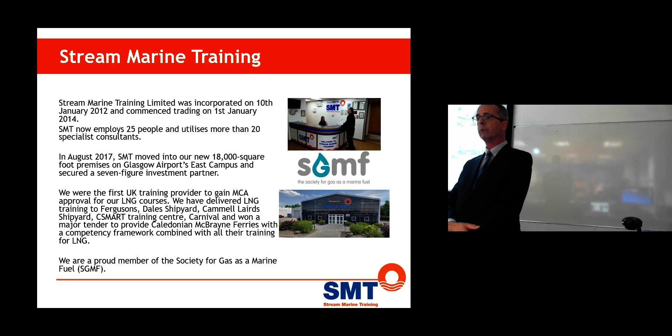A little bit about Stream Marine Training, because we don't advertise that well. We're basically based at Glasgow Airport. We've got our fire grounds and our swimming pool there. We also do offshore training, MES training, and work with quite a few companies. We have the boat site about 15 minutes from our building, so we are right at the airport.

A couple of bodies we are accredited with are the MCA of course for training courses, and MNTB as well. We also have Bahamas approval for the polar courses - polar survival, polar navigation.

A couple of customers we work with: we also have IMarEST, Carnival, most cruise lines. We work with more or less all the cruise lines. CSMART in Amsterdam, we do the training there, and we actually also trained the MCA. With Teekay we do all the Yamal projects survival training.

So let's start - IGF and LNG. These are two different things. When we talk about LNG vessels we use the same word IGF, but they're two completely different areas. LNG at the moment has the biggest interest and the most vessel orders, but there are quite a few more fuels which comply with the LNG or IGF regulations.

The items I would like to discuss tonight are listed here: why natural gas - why are we actually switching over to it? The principles of LNG, natural gas characteristics, which are very important because they don't behave the same as regular fuels like diesel and heavy fuel oil used on vessels. LNG applications, LNG safety, which is quite important, the containment systems, and a little bit about bunkering.

But what is the main reason for natural gas? Well everybody will talk about environmental reasons first. Is that correct - environmental reasons only? More than that. Actually the first one is quite funny - it's economic reasons. We're basically betting that the prices of LNG will come down and the infrastructure of LNG will be there, and then the prices you will see as well. It is actually cheaper than low sulfur diesel oil.

So economic reasons - natural gas at the moment, what we have available is about 60 years at current consumption rates, but consumption rates are going up of course. You'll see China coming online, India. You've seen the news, certain areas where the smog is going high - China has a lot of areas with heavy smog, and of course there the consumption of gas is going up.

But at the moment the amount of gas is roughly 60 years at current consumption rates, and we're finding gas everywhere at the moment. There are big projects coming online - you see that in Mozambique, Australia - but it's more or less all over the world you see big FLNGs coming online, and the gas production is actually going up.

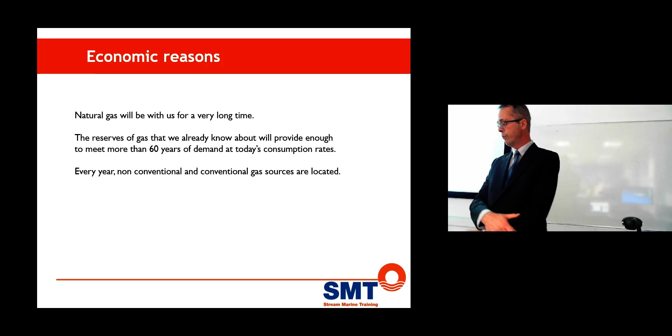So to give you an idea of the prices, I'll show you the different fuels here. I don't want to bore you tonight, but at the moment you'll see the current prices are roughly 285 in '18, 260 at the moment - Henry Hub and also Zeebrugge. Why the price difference between these two places?

It's the shipping cost, yeah, and that's it. Also storage, but yeah, you're right. It is quite cheap at the moment, but also with what you see from Yamal coming in on the spot market. Spot market is not normally how ship owners actually work at the moment. They basically have to sign contracts for extended periods.

Why is that? Because there's hardly any infrastructure. So if you see, for instance, Carnival, they have a contract at the moment, Disney as well, for 6 to 8 years, fixed price, and of course the supplier is most likely the larger companies like Shell and also Exxon. Shell at the moment is definitely holding the most of the contracts. They go for a roughly price at the moment between $6.50 to $7.

In MMBtu. The reason why these oil companies have such high prices is because of the infrastructure, they have to develop the bunker vessels. They have to get the logistics, but when the logistics come into place, then you will see the prices over the years come down. 2 years ago in Rotterdam we only had one vessel.

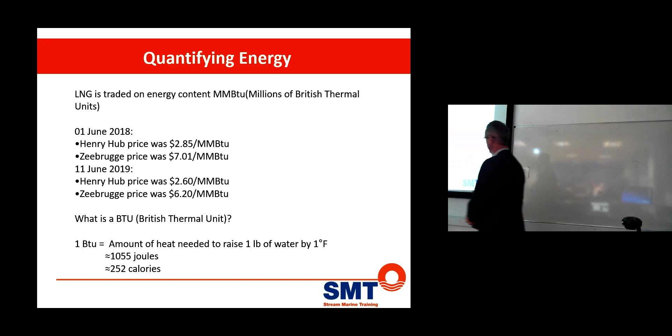In general, at the moment the trading standard is still 1 million British thermal units. It's one of the values we still have. Russians don't like it, so you see always the prices from the Russians in kilowatt kilojoules, right? But officially, this trading standard is still millions of British thermal units, or 1 BTU. It's like a certain amount of calories, and that's good.

That's what everybody dreams, right? Ecological reasons, yeah? So suddenly all the ships turn green. I see the Nova, fantastic, they have a blue environmental friendly logo on the side, right? Are we all believing that? No, no, well that's very good. So let's take that on board, right? Forget about it. There is some improvement in certain areas, but it's not the end and beyond. So it's just a step. LNG will be a stepping stone to other fuels which are coming in the near future too.

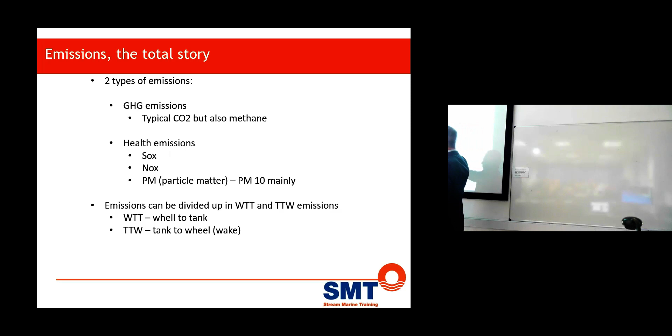The next one is something you will see in many cases: emissions can be divided into well-to-tank and tank-to-wheel. What I'm trying to say here is like when I buy a battery car, is that really environmental friendly? You see, that depends on if you look at the whole picture or just a small part of the picture, right? And that's what I try to say.

And that's a great shift, because where is the responsibility? To give you that in perspective, I will show a slide a little bit later on with the different fuels, but we first go to LNG and what the differences are and what the effects are with the different products. So if you look at NOx, you see a normal fuel, you see here also SOx, particle matters. You see LNG compared with HFO is roughly an 85% reduction of NOx.

SO2 is 100% reduced because LNG doesn't have sulfur at all. And particle matter is reduced by 96%. So that looks all very good, right? So far.

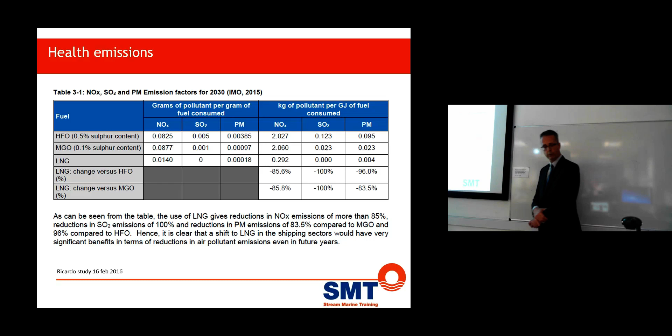Looks very good. This was also done by an independent study, Ricardo. They did it in 2016, and wrote another report two years later, slightly different, but it's a very good report. A bit boring, 170 pages, but it's good information. Gives a good picture.

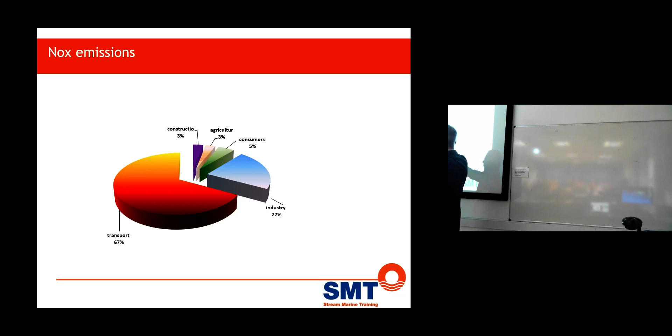Well, NOx emissions a little bit first. The biggest drivers of NOx - and NOx is extremely dangerous, actually one of the bigger polluters - more or less transport is the biggest culprit here. Construction side, consumers is very low. Industry can be controlled a little bit. NOx is basically produced depending on the combustion temperature - the higher the temperature, the bigger the risk.

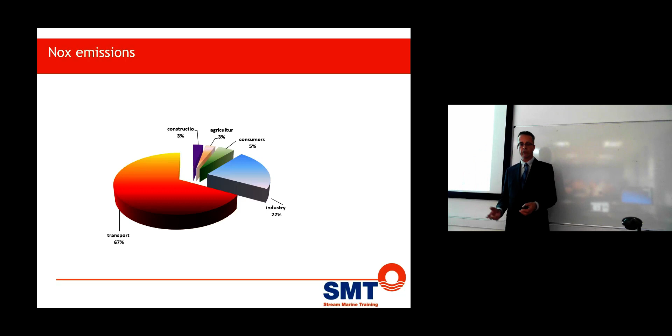But now we have another fuel, for instance like hydrogen, and hydrogen actually has quite a high NOx emission. So if you look at the whole picture, we need to look at what the product actually does in an overall concept, not just one bit. But NOx is definitely something we have to work on, because this is one of the more dangerous products.

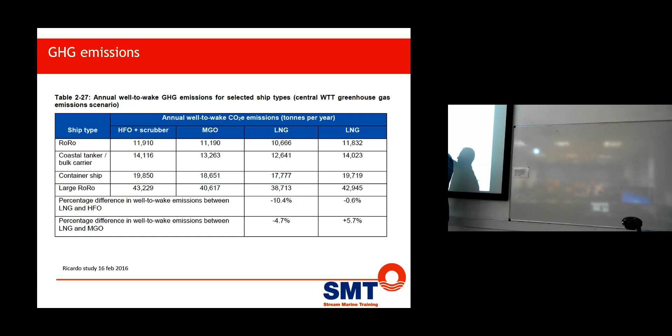Greenhouse gas emissions in general - if you look at this picture, it starts already becoming less interesting, right? I look here at the CO2 emissions, CO2 annual. I have HFO and scrubber on a RoRo vessel, and it goes down. Hey, actually I have more. How is that possible? It's a green product. I can have more emissions. And why is that?

That's greenhouse gas emissions, isn't it? Yeah, no - I look at CO2 emissions per year, right? Your fuel consumption goes up because of all these scrubbers in the system. For the LNG, you can have a reduction, yes, but it depends on where the LNG is coming from, right? If I have to send it halfway across the world, I also have to take into account the emissions of the vessel transporting it.

And then that becomes a completely different picture, right? So, having said that, you have to look at what actually the reality is. It's the same when I say look at the battery - if you only look at the battery, yeah, that's correct, but if I look at the whole picture, then it becomes a completely different story, right? So LNG by itself does not always reduce the CO2 emission.

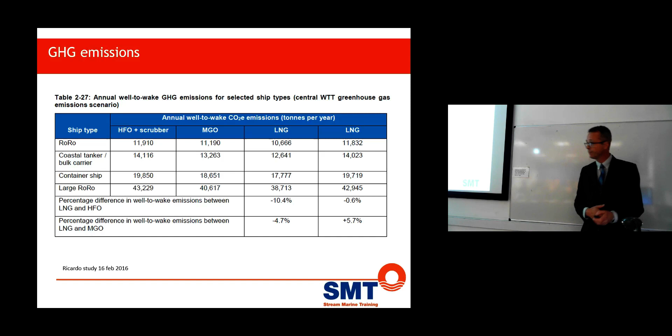Okay, emissions, the total story. Good. So I give you a couple of products here, and this is exactly what I'm trying to say - who is responsible for what. If you are a ship owner, do I have to look at the whole CO2 production, or only at what I'm consuming? Is that correct or not? So when I buy a battery car, am I only responsible, and I'm very green because I have the battery, or should I also look at the whole picture - the production to produce that battery, to scrap that battery, and where the electricity is coming from that I'm filling up my car with?

So then I have a couple of fuels here, and we'll go over them step by step. It's not really LNG awareness, but it gives you an idea of the different products.

So what ship owners are doing, they're shifting the liability. They say, well, listen, I only have the well to the tank, right? The emissions I am responsible for are tank to propeller. So when I reduce that, then I'm fine. Yeah, makes sense? And then I'm green, and I have a big sign on my ship saying that I'm actually green. Good. But if you start looking at these ones, you see as well that LNG, yeah, it reduces, but it depends also where it's coming from.

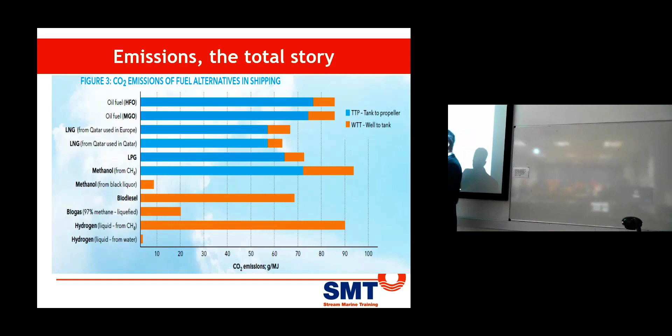Good, but some food for thought, so look at it as well. Hydrogen - there's a project going on now between Australia, Japan and China. They want to transport hydrogen to Japan and China. Very clean, hydrogen is very clean. Well, it comes from Australia, and they actually make it from LNG. So most hydrogen is actually made from LNG.

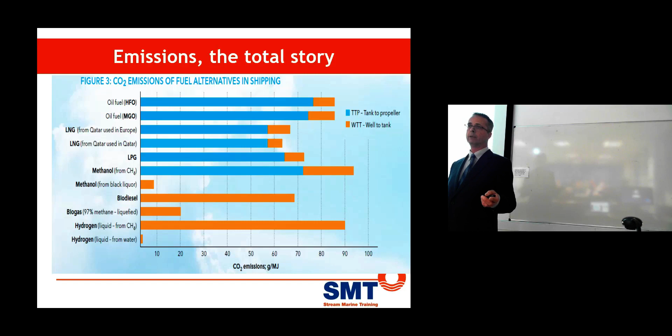Next one. In the shipping industry, everybody is familiar with the 2020 emission regulations. Some people have nightmares about it, others don't. But there's a couple of things you have to be very careful about.

Because everybody thinks a dual fuel ship is actually operational, always ready. It's not. If you look at the tier systems of an engine, more or less, when I have an engine which complies with tier 1 in the IMO regulations - the California regulations are slightly different - then I have to comply with these emissions. And how do I comply with these emissions?

It's done on the test bed. On the test bed, it's in perfect conditions - that means I do all the maintenance. But if I go into operations, you will soon find out that I'm not complying, or just barely make it. The stricter ones are tier 3, and everybody's talking about tier 3.

Ready? Most engine manufacturers are basically lying. Right? Because they say we can meet the standard of tier 3, but you have to run it on LNG. And that's a problem, because when I start maneuvering and I switch over to diesel oil, I'm not compliant with IMO anymore.

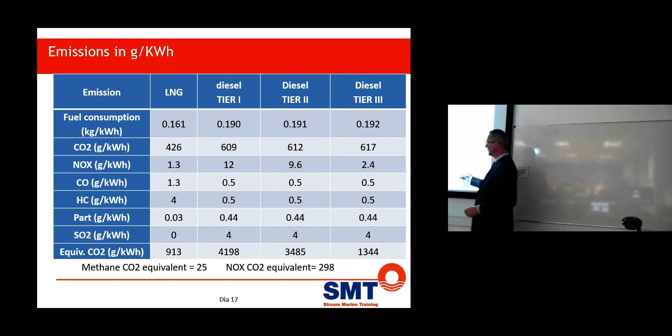Because if we don't, we have to bear in mind that any leakage of methane, methane slips by bunkering, methane slip to valves which are leaking, any methane I put in the atmosphere is 25 times worse than CO2. And if I go with my temperatures very high and I get NOx, that's 298 times worse than CO2. So that's something I have to avoid.

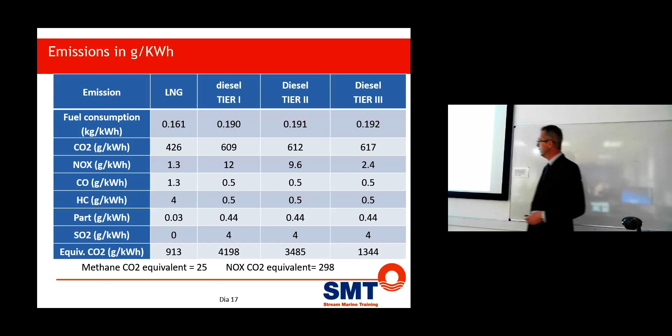And the NOx emissions, if you can see as well, between tier 1, 2, 3, you will see that the NOx goes down, but you have to do something for it. Nothing comes for free in this world. So if I want to reduce the NOx, I have to increase the amount of fuel. So the amount of kilograms per kilowatt increases. And that's the only way I can reduce my emissions, to keep my temperatures as low as possible, so that the high end of the combustion temperature doesn't go above the maximum temperatures.

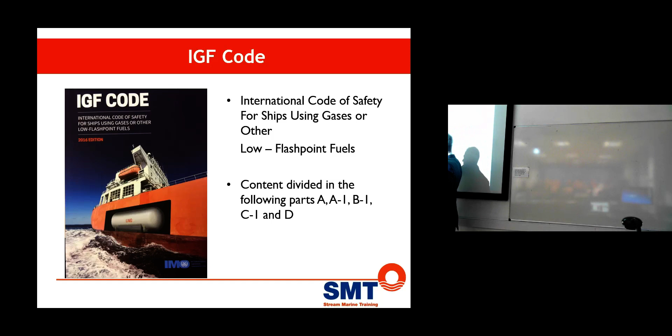Okay, so IGF code, and that's more or less a code. Everybody familiar with coded vessels? Well, you get a coded vessel if there are certain requirements which cannot normally comply. Of course, we've got Lloyd's, we've got the MCA, so everybody knows lots about it, right? But we figured out that one of the big problems with LNG is it misses one item. It's basically our old fuels with a flash point below 60 degrees. So we needed to get a different setup for these vessels.

So a code was developed. I think it started in 2005. It took a couple of years, and in the end it took up to 2015 when it was adopted. In 2017 it came into force.

But what is the problem with this code? Well, I got Lloyd's here. What is the problem with this code? Nothing wrong with it. It's perfect, right? But we forgot a couple of things. The industry is developing so quickly that there is nobody who can keep up with that code. And that's a big problem.

So by the time they got this in effect, there were two products or more on the market. One was LNG, so people thought about LNG. But then we got methanol, so methanol is in the pipeline to come. There's fuel cells, which I think we're going to get next year, 2020 - we get a chapter in it. But in the meantime, we've got hydrogen, we've got ammonia, we've got LPG. There's already ships coming out with it. Synthetic LNG, that's not discussed at all in this book.

And as we go as well, the idea of this is that there's a goal and an approach to provide mandatory regulatory provisions for safe and environmentally friendly use of LNG as a fuel. And what we're looking at is the design, the arrangement, the installation, the control, monitoring and operation of the machinery, equipment and systems using LNG as a fuel, and to minimize the risk to persons on board, the environment and the ship's structural strength and integrity, all taking into consideration the nature of the fuel used.

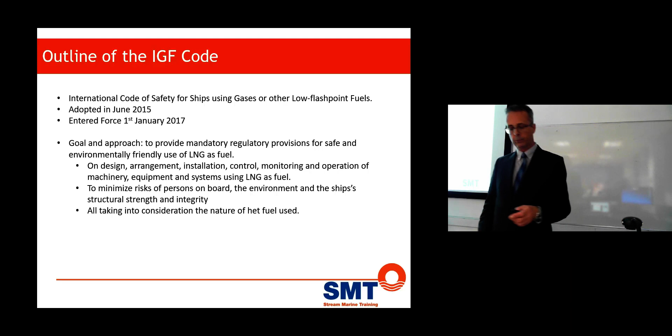Okay, so it came into effect in 2015, became mandatory in 2017. So after 2017, people who work on these vessels have to be trained, right? So there is more or less a basic and advanced training. Ships before 2017, when they get retrofitted, people have to comply with that. But you can still come on vessels which are built before IGF, before 2017, but crew members basically were not really having the tickets, and it's not mandatory.

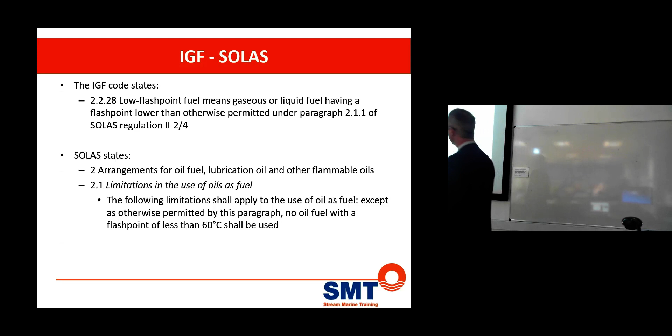So the IGF code states, low flash point fuel means gaseous or liquid fuel having a flash point lower than otherwise permitted in paragraph 2 of SOLAS. And the big drive, of course, is SOLAS - you shall never use a flash point lower than 60 degrees. Why is that? Well, it was written down, and it was more difficult to change SOLAS, so you need to have a standard, because if you leave a loophole, everybody will start using it. That's very simple. So the IGF code is providing information on gases and other low flash point fuels.

So how does it work now? There's already a couple of projects with the MCA where hydrogen vessels are more or less approved. You get class approval, so each particular drawing has to be checked by the class flag state and gets signed off, so you can actually do that. There's already hydrogen vessels running. One is in Shetland, a little ferry, but it's only 5% mix, so that's not really real. But there are other ships running already. The Norwegians have one coming online early next year with liquid hydrogen, and one with compressed hydrogen.

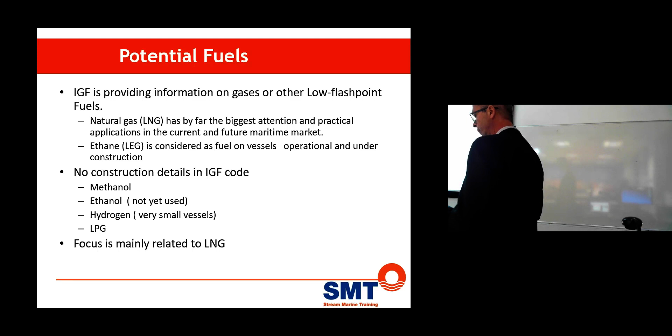Wastewater. Some countries now already say you can't do that anymore, so open scrubbers is already being banned in some places. And places like Singapore say if you have a closed scrubber, well it becomes chemical waste, so that's basically a problem. But having said that, a lot of these vessels have been building these scrubbers in the last couple of years, and they've already saved so much money with that, so the investment is already paid back. But it's not really a solution.

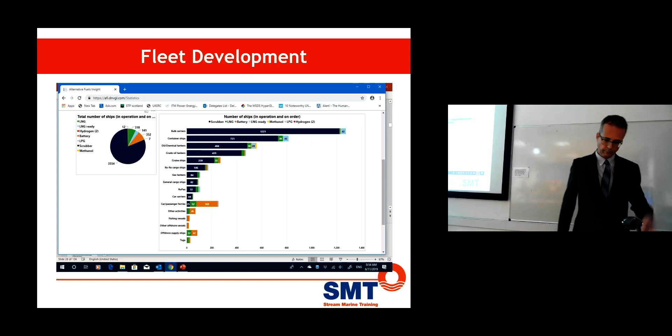Most of the time they actually sail on LNG. Methanol - I don't hear many people talk about methanol anymore, but if you really look at it, it's quite an interesting product because you can put methanol in normal tanks, you use a normal bunker tank. It doesn't take too much to retrofit it on a ship. The only problem is if you get a fire, you don't see it, but okay, that's the same with hydrogen. There's ways to work around it. It's more or less about availability - Stena Germanica has a plant quite close by, and again it's like availability of products. Availability of LNG was also a long time a showstopper. Availability of other products will be a showstopper in the future, because the infrastructure has to be there. If there is a demand, somebody has to create it, so somebody has to invest in it.

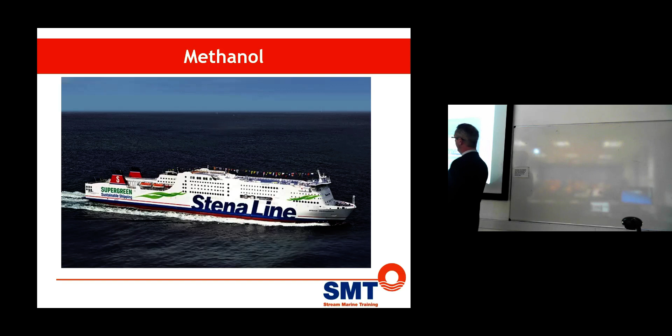That's how it more or less works. Everything is expensive - if you look at the big picture, it becomes even more expensive. So cruise ships as well, you have to give up a lot of cabins in order to sail with LNG. So anything I can do to get that back is a benefit, because cabins make revenue. That's no doubt about it. But methanol definitely has an application for the future when it would be available. I agree it's not a very cheap product, but it can be made quite cheap as well - it depends on where it is.

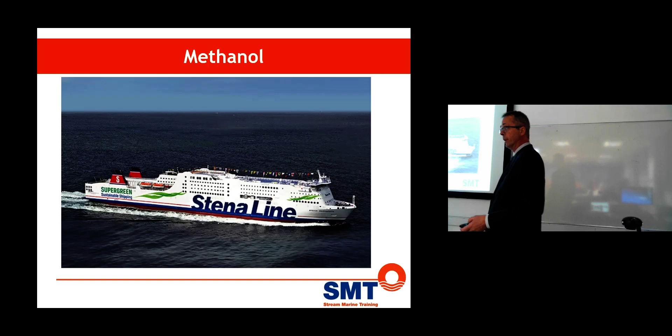Well, compressed, it's very explosive, it's hard to get the system tight. It doesn't really like running in an engine, although everybody says that it can run in an engine. It's not ideal, it's very hard to do the combustion, but it would work in a fuel cell. Fuel cell development is not that great at the moment - there's no real shipboard applications at larger scale. You see now as well, read in the news, like up to a couple hundred kilowatts ship side, but shore base you can go up to 1 megawatt for fuel cells, but we're not there yet.

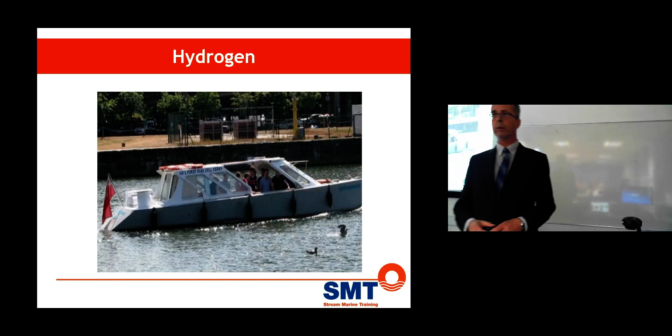So hydrogen as well. So what is natural gas? Well, that's a very good question. It's a mix, and that makes it bloody complicated, right? That's something to realize. It's easy when you operate from one port to another port and use the same gas every time. It becomes much more complicated when you start different geographical areas, because the product - there is no standard for LNG. It depends on where it's coming from. But the main components of LNG are more or less methane, ethane, and propane.

So when I get a bunker sheet - that's another one - on a ferry or if I'm on a cruise ship, I get a bunker slip from the refinery. I have to take it, I can't take a sample, because it doesn't give me the right information. So I need to see a sample sheet, and the sample sheet will give me the content for how much methane, how much ethane, and how much propane. LPG goes from propane to butane, but I must say, in normal bunker slips I always see some remains of propane still available. And after that it becomes gasoline further down.

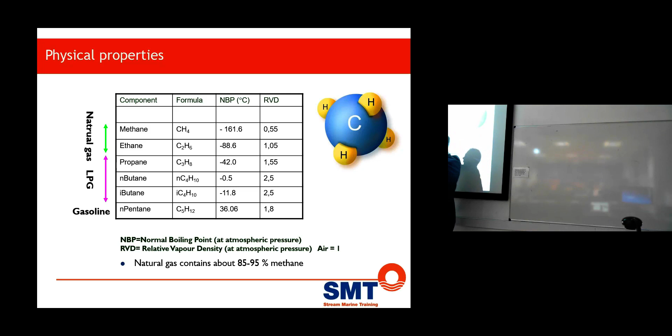So when I get an amount of LNG on my ship, as soon as I get it in the tank and I get boil off gas, which is only methane, my composition of LNG in the tank starts changing. So I have to be able to manage that. Ethane and propane will not boil off, so I have to find other ways to get it into the engine - it's not like just using the boil off gas.

One of the ships, I can't say which one, but it was a passenger ship. They got delayed by 2 months, so they started using the boil off gas. After 2 months, they wanted to start the engines again - no go, because the consistency in the tank had already changed that much. So they basically had to bunker again and get everything mixed up before they were able to start it.

In the manufacture of LNG, where you take your natural gas, you're generally stripping out the ethanes and propanes in the LNG train. No, you just end up with a mix - it's not methane 99.9%. I'll show you in a moment. I can't strip that out.

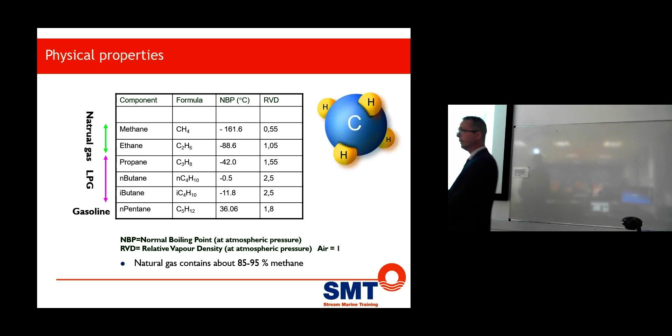But don't they produce methane with biodigesters? There are small units now, 1 megawatt units, springing up all over the country - biodigesters - and yes, I can make pure methane there. But that's not what I normally sell because I need much more product, so I have to work with a standard for an area.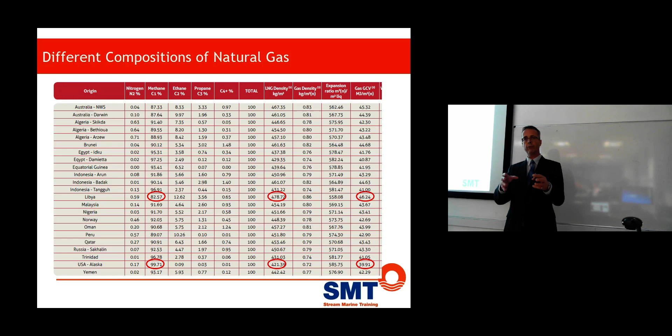The problem for a long time was that you have different places where gas is coming from, and of course somebody didn't get the right mix of sources together, so you get big differences between different places. To take an extreme example, gas originating from Libya has a methane content of 82%, and a density of 478, and 46 megajoules per cubic meter.

Now everybody asks me every time the same thing: what is the best product? And you know what my answer is? Calorific value - it's the gas which my engine is set up for.

When BC Ferries built two ships in Flensburg, they did the sea trials, then of course they went to Canada and couldn't meet the normal speed. That's because Alaska has a very high methane content, so they basically had to set up the engines for that specific gas - that's very easily done - and then they leave it running.

So that's what I'm trying to say - if I am an operator, like CMA, operating in different geographic areas, you will get different gas. There is no standard as such for gas. If I buy from the national grid gas, if I go to Cryogenic, they have a mixture so they can mix some, but it's very limited. So I get a certain gas quality.

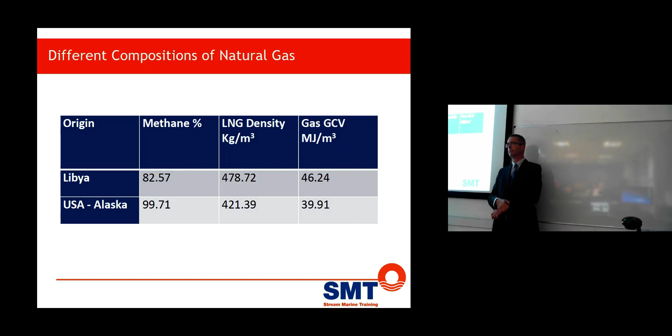The reason I'm bringing it forward is that when I sailed on LNG vessels, if we had a vessel with a cargo which had high ethane content, when you got to the bottom ends, you couldn't pump it, because the spray pump would not be able to pump at that density, the density of the cargo was too high. So that's why I was asked the question, but I'll come to it later. You see, it's not that easy, it's not like a regular fuel. So I have to manage it way more, think in advance, and see what's going to happen.

Good, so definitely different methane content, different density. That's very important as well, when I get a certain amount in my tank I have to write it down, and it has a certain megajoules per cubic meter.

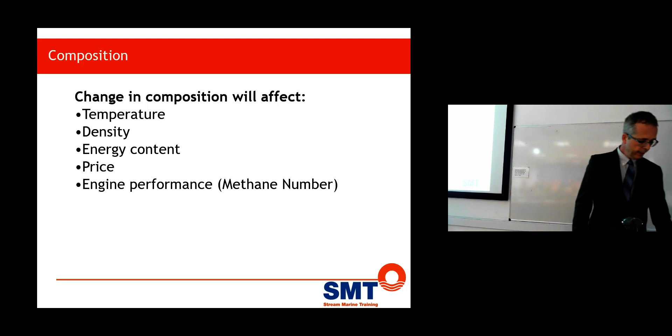Good, so changing composition will affect a couple of things, and that's something you really have to get in your head. Because an IGF tank does not have a sounding pipe, so I have to rely 100% on my automation. The most important ones are my temperature readings. Temperature is absolute vital, because when I get a wrong temperature, what's going to happen? It starts boiling off. It has happened already.

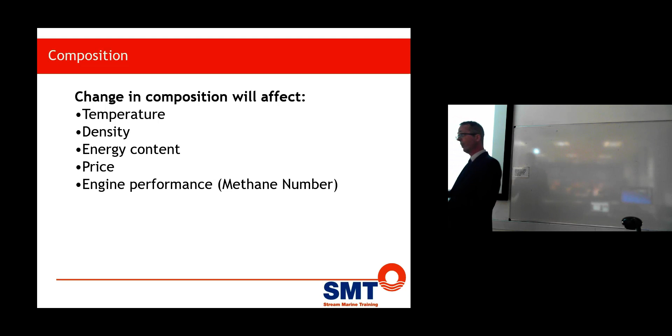With BC Ferries, there's nobody on board, only one night watchman. The guy comes on board, at the gate there's a camera that looks at the temperature of the truck. If the truck doesn't have the right temperature, it goes off. And guess what, I was training the guys from BC Ferries and they ran into this problem. They didn't realize it, because it's not so simple to start bunkering. So they ordered 4 trucks, and they were in Spain, but you can only have 1 truck at a time in the port. So these guys were sitting there for hours and hours in the sun. When truck number 4 came in, all the safety valves went off. They don't have any means to control it. Yes, a cruise ship has means to control it, they have compressors, all types of equipment to control it. But smaller, simpler systems don't have any control, they purely have to manage with what they have on board.

So one of the critical ones is the temperature. Of course, the density makes a difference as well. And then of course the energy content, and automatically the price. So the price is normally specified in the contract.

And then one of the big things is the engine performance number. If people are used to an engine that runs on diesel oil, I have a fuel pump and that's set. If I get more load, the ignition, the combustion is set. With a dual fuel engine, I can basically alter that. So I not only have my regular fuel pumps, I also have a common rail system, and I can slightly alter the combustion.

And one of the items you will see as well, on all the cylinders you have a so-called NOx sensor. If the NOx increases, it will adjust the combustion. So these engines are way more complicated. If I have a normal engine which looks exactly the same as any other one, and it's a Wärtsilä DF engine, you can have roughly 20 different options.

That's all I say. Yeah?

As an engineer, you really need to know what engine you have and what it should do and what it can't do. I've often seen people say, well, we have problems with our injectors. But what system? Is it in your normal diesel mode or in your gas mode? That makes a big difference. But the engines are way more complicated, and that's just a fact. Remember what type of engine you have.

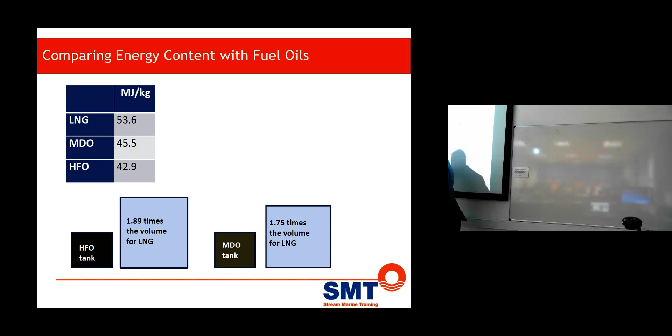Okay, other problem you have, of course - it's quite easy to say that as well. These ones are structural tanks, the LNG tanks are not. So that's another loss as well. You need also excess space, so it's not that simple to organize. You lose quite a bit of space, a lot of cabins.

Good, we'll quickly go over this, won't spend too much time on it. Methane number - everybody familiar with methane number? Methane number is just a fictive number. Pure methane in an engine is called 100, it runs with pure methane, the methane content is 100. Pure hydrogen is 0, so that already says automatically that hydrogen cannot be used in an engine. Although, when I Google on the net, I see that it's possible - possible up to roughly 20%, but after that it becomes really cumbersome. In a normal four-stroke engine, it will create knocking, and that's one of the things as well.

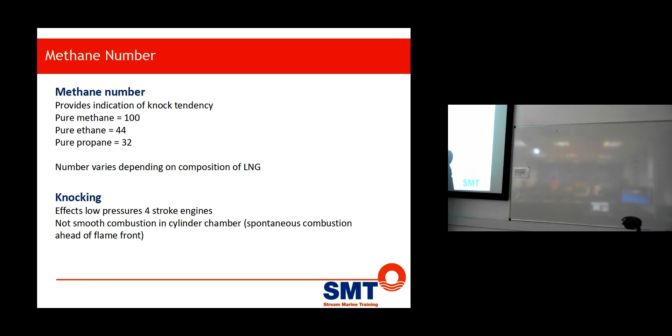If you don't have pure methane - ethane you see is 44. If this drops off, the knocking sensor has to be adjusted, otherwise I would get knocking in the engine. So the key is, all the engine manufacturers are working very hard. I hope by the end of the year to have a standard for this methane number. But at the moment, when I get my gas, I have to go to my methane calculator from the respective engine manufacturer. So I go to Wärtsilä, I put my bunker sheet in there, and it will give me my methane number, and it will tell you yes, you can use it in the engine, and the knock index on your engine should be this. If you're going out of these set points, it will basically tell you to call Wärtsilä or call MAN to see if you can use it, yes or no.

Knocking. Good. So the next one is cryogenics. More or less the dictionary definition, and you can search it as well.

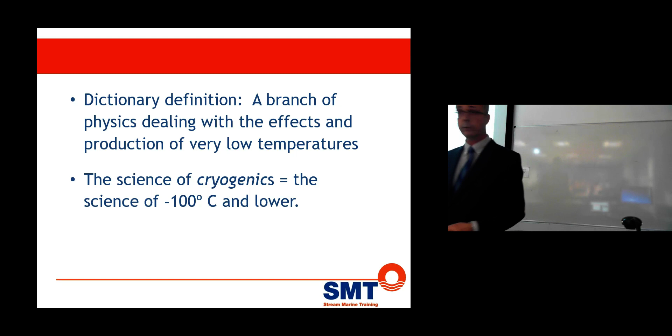The science of cryogenics is the temperature below -100. So that excludes LPG - yeah, it does, because ethane as well is like -80, so technically it's not cryogenic. Long story short, it's very cold. I would say anything below -75 is cryogenic, because the damage it does is similar. But it is very important, because the lower the temperature gets, the bigger problem I'm going to get.

What type of problems? It's maintaining it - it's like insulation, but also the materials have way more of a test regime. It's way more complicated, even simple PPE. At the moment, there's hardly any PPE for liquid hydrogen. If you see the requirements to go to -253, there are very few products that can actually sustain that. And that's what I said as well - if you go to roughly LPG, which is -80, the requirements for the equipment, for the valves, for all the automation, are way less stringent. When you go to liquid hydrogen, a lot of temperature measurement equipment can't cope with it anymore.

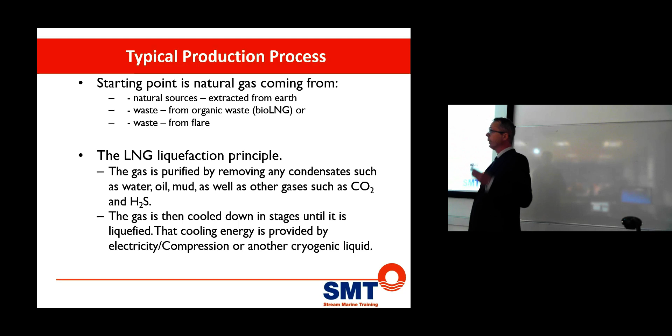So how to make a cryogenic liquid? I'll go over that slightly - we mentioned it as well. The starting point is natural gas coming from natural sources extracted from Earth, or from organic waste as bio-LNG, which is getting more and more common these days. Also from flare waste - you can use flare waste on the oil rigs. Then in the LNG liquefaction principle, the gas is purified by removing any condensates - water, mud, oil, and then CO2 and H2S. And more or less then I go down to the cool down process.

Well, a little bit more - you get transportation by pipeline, you get the treatment. Also one of the most important things: traces of mercury. Mercury - although aluminum is a very good product, it doesn't like mercury very well. So you will see in a lot of cryogenic systems where they use aluminum, it's often on the outside, so you can actually visually inspect it, because otherwise you can have a chance of aluminum-mercury corrosion. And then it's ready for transportation and shipping.

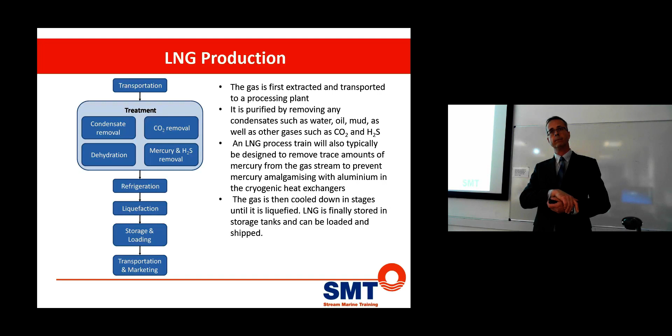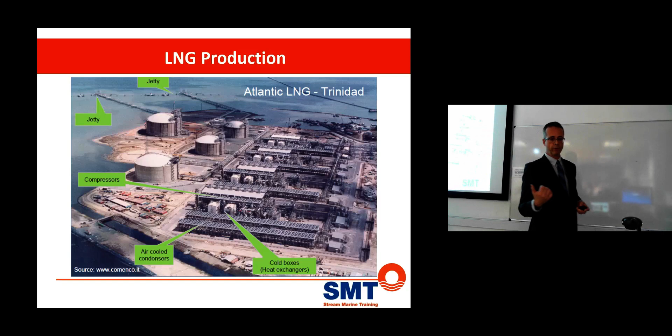As a ship owner, do I also have to look at the CO2 footprint to achieve this? Depends how green you want to be, or claim to be - you get this super green now, and you get the blue green. So you can make it as green as you can be, but it's a bit like the Volkswagen thing, yeah, you can adjust it. But that's something you have to bear in mind - it costs a lot of energy to produce the liquefied LNG.

Okay, so what is LNG? Well, very simple - it's UN number 1972. It will never change. That's set in the IGF code as well. That's the product, and that's it. It's a liquefied gas - remember, every time I mention it, it's a liquefied gas. It wants to go back to its original state. If you lock it up between two valves, you have a massive problem, right? Like with diesel oil, I can close two valves, but I always have to think this is gas, so it wants to go back to its original state, which is 600 times bigger.

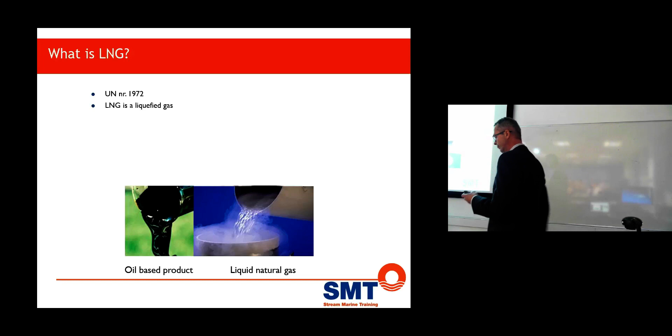LNG is natural gas that has been cooled and condensed to a liquid at atmospheric pressure, at roughly minus 162. Minus 162 - I always say it's a range when you look at the MSDS sheets, because it depends on what the mixture is, so how much methane, how much natural gas. It is also colorless and odorless.

Why? When I go at home, we mix acetone, I think, to make it odor, like mercaptan. But I can only do that when it's evaporated, right? So there's no point doing that when it's liquefied. Now the IGF code didn't specify the same as shoreside, because shoreside I always have to add gas after it evaporates.

It's quite interesting, because I started my career with Shell with a colleague, and he said, I never smelled anything. I said, yeah, that's right. He said, well, he thought we never leaked, but trust me, we leaked.

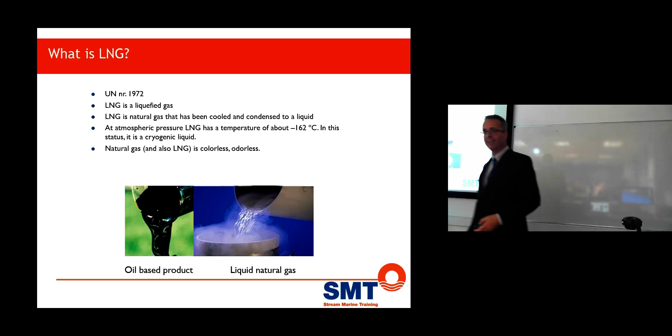Okay, so in gaseous form there's odor, and there's the safety benefits. But having said that, still 20% of people are slightly smell deaf or really smell deaf, so they wouldn't even smell it anyhow. It's non-corrosive and non-toxic. So I don't know why you have to inspect the tanks because it's non-corrosive and non-toxic. It's absolutely non-corrosive.

But it could get a stress corrosion effect on the tanks, couldn't it? Yeah, the stress on the tank, but I can see that on the outside. I've never, shoreside we never do any inspection, we do everything on the outside. And after I've seen tanks, well, my brother's tanks were 40 years old, and they look like new.

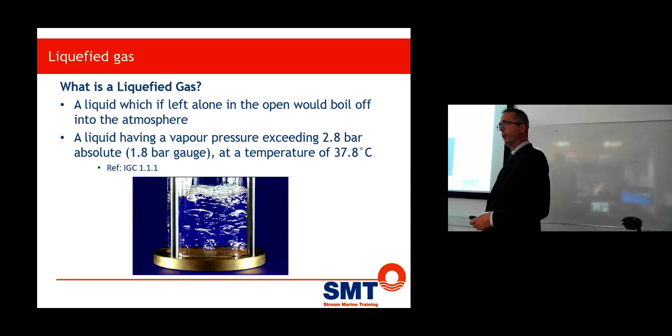All right, what is liquefied gas? Well, more or less a liquid which, left alone in the atmosphere, would boil off. Yeah, that makes sense. So if I put a little bit of nitrogen or LNG in it, it would boil off. So it wants to go back to its origin.

Physical properties of LNG, natural gas. It expands roughly 600 times. So remember, you can utilize it as well, or it can really work against you.

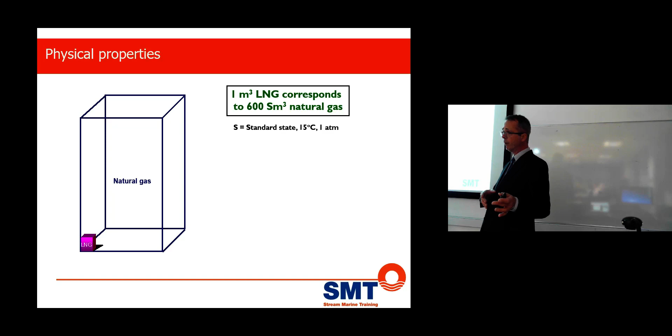So if I lock it up between two valves, I need a safety valve in the middle. So I always have to realize, when I close the valves, is there any LNG in the pipe? But I can utilize it as well to drive out the liquid, because I can close the valves, build up the pressure, and basically move it up. So that has a pro and a con, but that's more or less where it wants to go.

LNG is lighter than water, so it floats on water. That's good. So when I have a spill in the water, not a problem, it will go up.

LNG density is 450, water density is 1000, so it will float on the water. But it's also a disadvantage, because what do you think is going to happen when it floats on the water? And what do you need for evaporation?

Heat, and where does it get the heat from? From water, water becomes ice. From the ship which is laying next to it, so it will pull the heat out of the steel. Just be aware, it can cause brittle fracture. I'll show you some nice pictures after this. But that's where the heat comes from, and that's the disadvantage when it's floating on water.

So you will say it chills the water to such an extent that the metal can be affected with brittle fracture. Yeah.

A couple of other things I'm not going to go into depth, but a couple of products you cannot use for fighting fires with LNG. Well, water, because of density, right? So it will float. But having said that, you can use water if you get LNG on the deck to segregate it. You flush it with water, and the LNG will come off the deck, so it's a protection as well. But foam you can't use either, unless you use very low water content foam. So you see shoreside they will use the big foam generators.

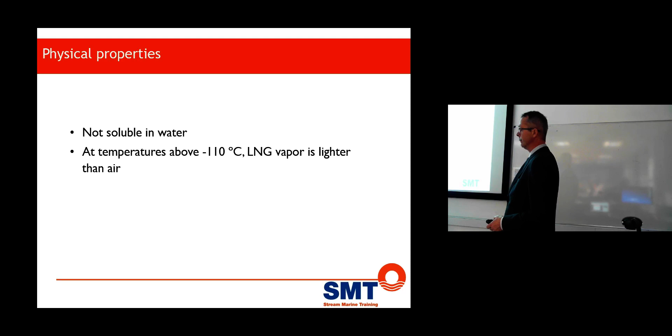Good, it's not soluble in water. By nature it doesn't like that. And at temperatures above minus 110, vapor is lighter than air. So what will happen normally?

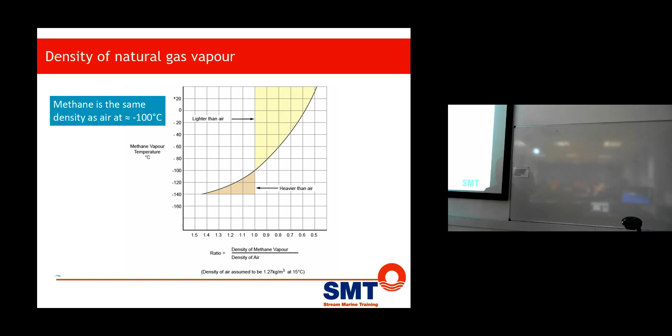So the relationship: raise the pressure, raise the boiling temperature, that's clear. And lower the pressure, lower the boiling temperature. That's very interesting when you see the watchkeepers, because suddenly when they reduce the pressure in the tank, you see the level going up. But you don't get more LNG, that's just the gas law. It's not like a diesel oil tank, you don't have that there.

Okay, flash point - you said it as well, flash point below 60 degrees. Well, what is flash point? You put heat in it, closed cup, there's still air in it, you have an igniter, and at one temperature it starts, the vapor will start to burn. Methane, minus 188.

That doesn't make any sense. Boiling point is minus 161, and flash point is minus 188. Well, one has nothing to do with the other. The fact is, vapor, even if it's minus 188, is when it gets spark ignition.

So what do we do? We make sure that there's no oxygen anywhere in the LNG system. So how do we do that? We use nitrogen first, and then of course after that we drive the nitrogen out again, so there's only LNG in the tank because I don't need any other gas.

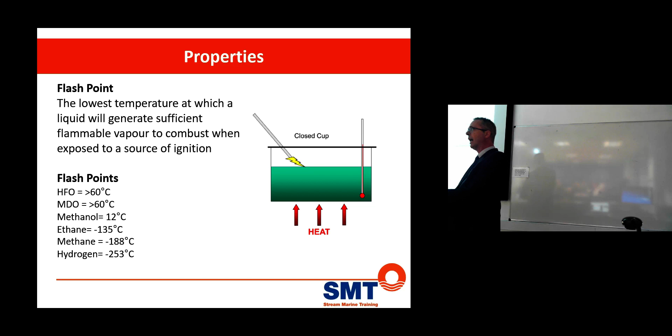That's often the mistake they make with bunkers, and that's why I agree that sometimes tank inspections are required, because when I connect the bunker hose, I have to go through a whole process to get the moisture out of that hose. So I first use nitrogen, either gas or liquid form, and then I purge it out, and then I can start using the gas. If I don't do that, then I get water.

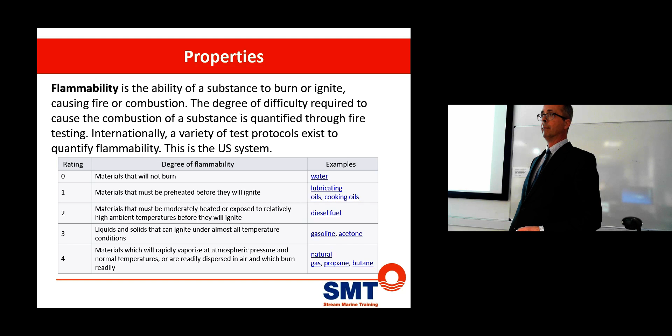Okay, flammability. Flammability is basically - gas is flammable, everybody knows that, right? So that's just a given. Well, that's more or less tested by fire testing, because materials that will not burn - water. Is that true? Exactly, so that's why when you say fire testing, you need to understand it's just a definition, but it's not all and beyond. But we know that gas is flammable.

Okay, another one we can argue about for a long time: natural gas auto ignition temperature. Auto ignition temperature is more or less the temperature a product ignites in an engine with a diesel process - so we don't use any spark plug, just compression and ignition. Diesel oil is 260 to 370 degrees, and well, that's what we use in a diesel process, we use diesel oil.

Could I use gasoline in a diesel engine? Exactly - so you could technically do it, but sometimes knocking comes because of pre-ignition or sometimes late ignition. But you could get away with it. Won't do much for your big ends or your back though. Exactly. Well, one of the things is you see natural gas doesn't have that temperature, so natural gas cannot be burned in an engine by itself, in a diesel engine, even with a high compression ratio - it cannot.

Absolutely not possible. LNG is not like LPG - LNG is a very, very reluctant product to burn. If I have a Pyrex jar here, I could light it and put it right in front of you - it looks like a wax flame. It's too rich or too poor; the rich is not very good. So I have to assist it - how can I assist the combustion?

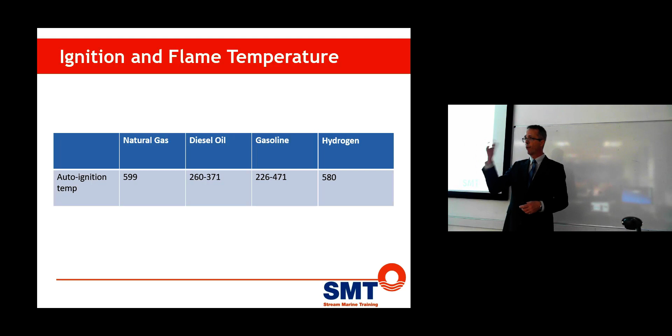Spark, but it's an auto process, yes. So then you can have a pure LNG ship, yes, or pilot fuel with diesel. So I still need a diesel pilot system, which basically creates the ignition, combustion, before the main combustion starts. So the engine does not run on gas alone - the dual fuel mode means it can run on diesel or diesel-gas.

It's about 5%, right, so I have those emissions as well. So only a pure gas engine can work with a spark plug - you need two means of injecting the gas. The pilot gas gets ignited, and it's not a simple process, and then you get a clean combustion. But otherwise you need to assist it with diesel.

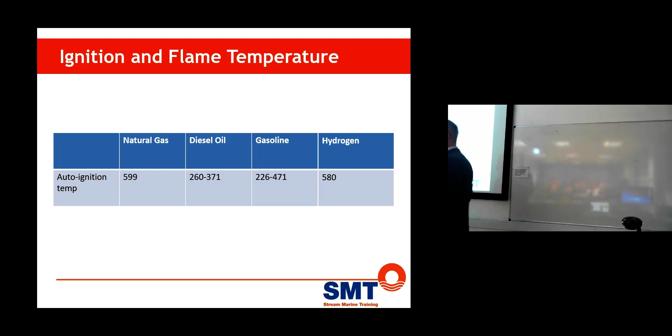Okay, so LNG - a good energy source, fossil-based fuel, that's what people don't like. Boiling point is approximately minus 162. It's a cryogenic liquid, natural, odorless and colorless. LNG is not flammable - natural gases are, so that's another misconception.

Okay, one of the others is - I'm not going to go into depth - flammability. The flammability range is basically set in the MSDS sheet: 5% for LNG, 15% is the top value. Guess what petrol is?

As long as I can manage it, the system is automatically designed so that at 20% LEL, the gas detectors, located in most spaces, will give an emergency shutdown 1, meaning give an alarm. At 40% LEL, it will shut down the whole system, isolate it, and switch over straight away to diesel oil. Nobody gets injured, and you wouldn't even notice that the engine switched over, with the exception of the alarm, but on the bridge they wouldn't even see it.

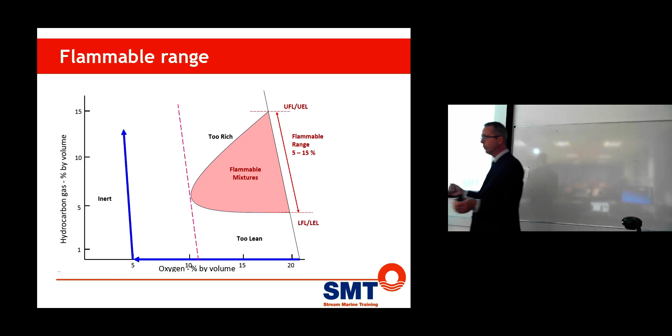Another way of working, you can see that as well. If I want to stay out of this area, on gas carriers, of course, I go all the way down to 0, and I don't have any oxygen.

On cruise ships, we start now using an oxygen deprived area, and some other ships as well. So our bunker system is basically with a reduced oxygen, reduced till roughly 12%. The bunker station is semi-inert, and the tank connection space is 12%. Why is that? Well, then I will never be in the flammability range.

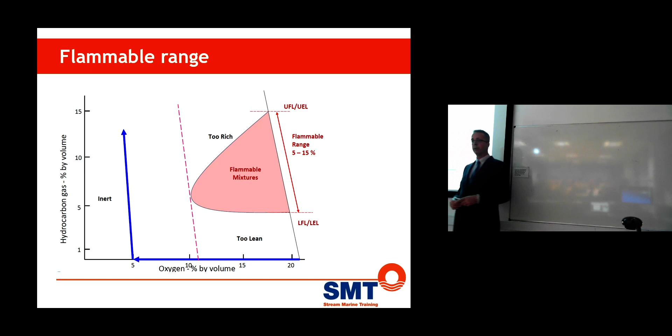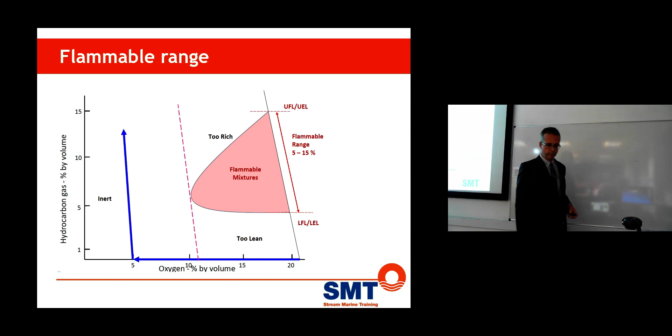So if there is any escape for gas, it still won't affect me. If I go into the bunker station, I basically first have to press the ventilation, and it will replenish it with oxygen. There's another reason why it doesn't go further than 12%, related to gas detectors, so we can protect the space as well.

We learned a lot of things because they took sensors and stuff, and now we know in an open space, with 180 tons, this dissipates within 14 minutes. It doesn't come far from the water, but the one really important thing is that the flammable area is very small.

So the flammable area is inside the cloud. If you're standing outside the cloud, you can have a cigarette wherever you want, it will not ignite. So that's great, a couple of tests.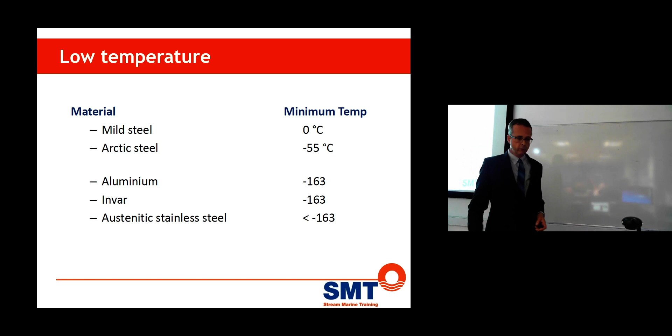That is roughly there. So when I go colder, I need even more stringent materials. Stainless steel is more or less the better solution, but we're starting now to work as well with these Arctic steel tanks because it's easy to manufacture.

See the cracks? That's brittle fracture. See if I have another one. Yeah, brittle fracture. So you expose the steel to this, and the problem you're going to have is that if a product is exposed to cryogenic conditions, you do not know if it still retains the same mechanical values after that.

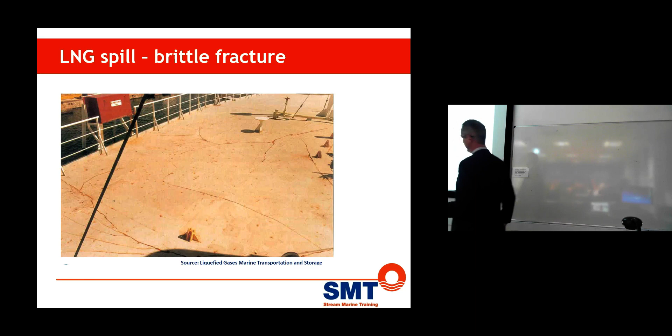So that's also an additional cost. Anything I buy which has a cryogenic value, like valves or gasket material, all has to be tested to check if the material structure actually permanently changed or not. But it can do serious damage, so that's to avoid it.

Okay, are we still doing good for time? How much? Keep going.

Oh, I'm doing good. Good.

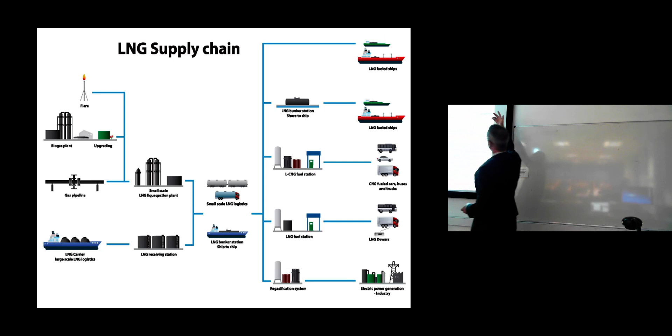All right, LNG supply chain at the moment. The most important LNG carriers have been around for 70 years. We've had no accidents, well, oil majors call them incidents rather than accidents. There have been some incidents. Big LNG carriers are all quite old, 70 years, this is more or less new. The smaller LNG fuel stations, CNG fuel stations, you see them popping up now, right, left and center. That whole market is starting to develop. LNG bunker vessels, two years ago there were only a couple, now we're getting them everywhere. It's going quite quick, with a lot under construction as well.

Okay, good, next one: IGF Code Chapter 5 General Arrangement Goals. Principle of segregation. The main philosophy is we segregate gas from normal operating areas. It's a bit more complicated than on a gas tanker. On a gas tanker, when I see a no smoking sign, I know I'm standing in a dangerous area, the gas is at the front. But on these vessels, like a cruise ferry or a passenger vessel, it's much more difficult.

It's much more difficult because I can have cabins next to the bunker station. Can I have a cabin next to the bunker station? Wait till you see the Iona. You can have everything next to the bunker station, and next to the tank as well, for that matter, as long as you de-risk it. So everything has to be de-risked. The words you always hear with these LNG vessels are hazardous and de-risked. They are basically crucial risks, but we can de-risk everything until there's no issue anymore.

The idea is that there is segregation of tank areas, engine spaces, vent areas, and no direct communication between gas spaces and non-hazardous areas. It has to always be reinforced with a cofferdam. And in hazardous area classification, there's segregation of piping systems.

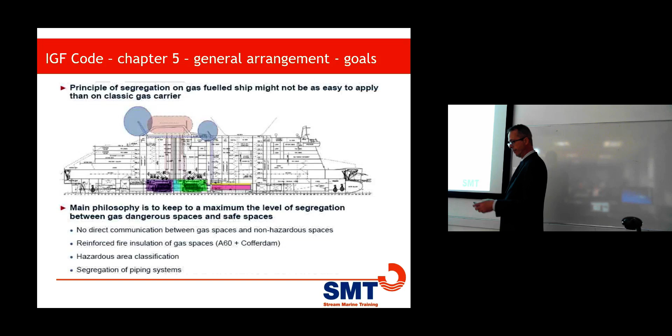Another good thing is the fuel pipes in the engine room are normally double wall, with two types of options. The first is gas on the inside and an inert gas, which could be nitrogen, at higher pressure on the outside. If I get a leak, the higher pressure means I'll get an alarm, emergency shutdown, and nitrogen will go into the space. The second option is exhaust ventilation.

I have an under pressure here, basically extracting to the funnel, with gas detectors at regular intervals. If I get a leak, the gas goes into the second pipe and it will trigger a gas detector. Gas detector 1 will be fine, but gas detector 2 triggering means everything stops and goes to safe mode.

Good, all right, simple fuel drawing. The first time I saw these LNG fuel drawings, I thought, my God, I took the wrong job. It looks really, really complicated, doesn't it?

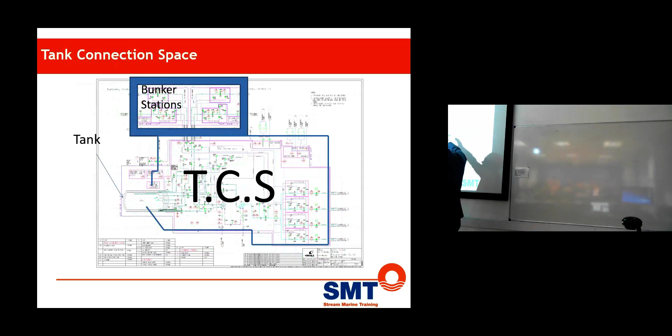So what you always have to do when you see these drawings for these LNG systems is reduce it. I've got my bunker station here, and my tank connection space. I'm going to reduce it further, and there's nothing left, right? Quite simple. But why is it so difficult?

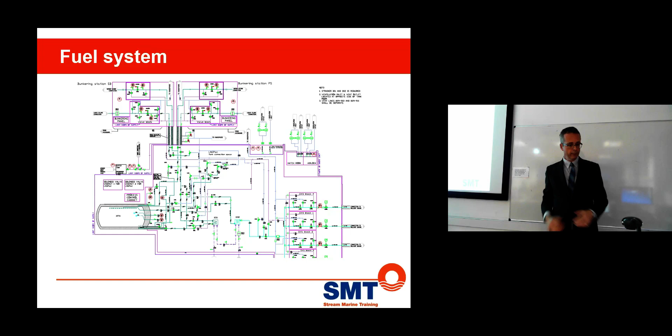The reason, as I said, is I cannot lock up my LNG between two pipes. You see certain valves, so automatically I need a safety valve. All these safety valves are interconnected, and I also have nitrogen purging. So this is a normal bunker station, basically has a pipe coming in, but you see here pressure gauge, temperature, they're totally irrelevant. That's the problem with AutoCAD, you don't see the difference between the sizes of the diameters. So you really have to look into these drawings. In the end, I go for this one.

It's quite simple, right? So what is different between a regular diesel oil tank and an LNG tank? First of all, I have a filling, and I have the return as well. And now I see two different connections - one on the bottom and one on the top. Why is that?

But remember, there is a relationship. When I fill up the tank, what's going to happen? I reduce the volume. So what happens when I reduce the volume? Temperature increases, pressure goes up, right? So I have to stop at one stage. When I top spray it, I reduce the temperature. What happens when I reduce the temperature? Pressure reduces. Ta-da! So that's the main difference compared with a regular diesel tank.

On top of it, you ask me, how do you do that with the pumps? Well, with the Wärtsilä system, fantastic, I don't need any pump. It's the best system ever. Anything with cryogenic and pumps is not a very good solution, right? But Wärtsilä figured this one out. Most ferries, you don't need to do that.

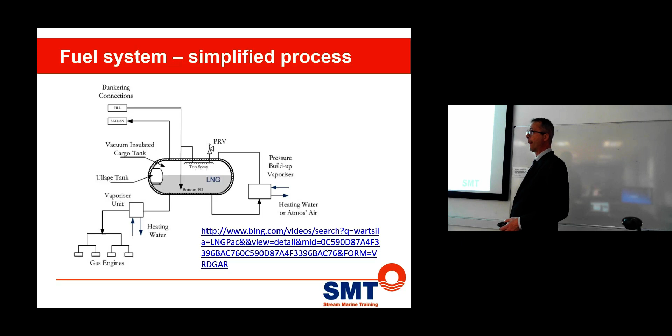This unit - that unit. Looks big. Well, you can make it any size you want, right? You can put it in a tugboat or you can put it in a cruise ship.

This is the tank, vacuum insulated. Basically, you have a vacuum on the inside, between the inner and outer tank. And then all the equipment is in this box. What do I see in this box? A gold mine - an absolute gold mine. So that's how it looks on the inside.

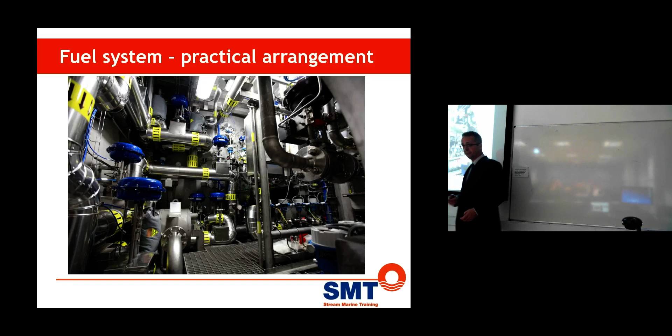Very nice stainless steel, very shiny. And then you see all the control valves - 20 of them, very expensive. So that's how it looks. It comes basically as a unit - this is the whole unit. You put the unit in place, you only need power, a couple of heating pipes, a little bit of electric cable, and then to the engines. That's it, it comes completely as a unit.

Okay, so the last one, and then we're done - bunkering. Bunkering, yeah. What is the problem here? What is the problem? Liable to go bang? No, but what is the problem? Does it look any good?

Quite normal, this? You've seen it quite often - pontoon in the middle, hoses sagging through, interface between. There's a bit of an afterthought, right?

Ship was built in Papenburg, right? Bunker station, traditional bunker station. Nothing fits, doesn't fit at all. Nothing additional, so everything related to safety has to be on the other side, which is already a bad move. It should technically have a quick disconnect. They don't have enough space here, so they actually do a flange-to-flange connection, which means every time they have to get a flange like that up. Normally you'd use a quick connect.

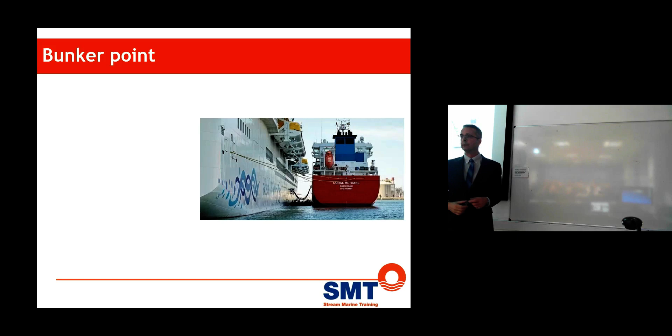Another operator, like MSC, they have another problem, because they pick up passengers in every port, in different ports - sending somebody with a cigarette here. Didn't think about it, eh? They didn't think about it. So with my company as well, they freaked out, the security ones now ensure all the balconies are automatically locked, because it's a problem - it can happen.

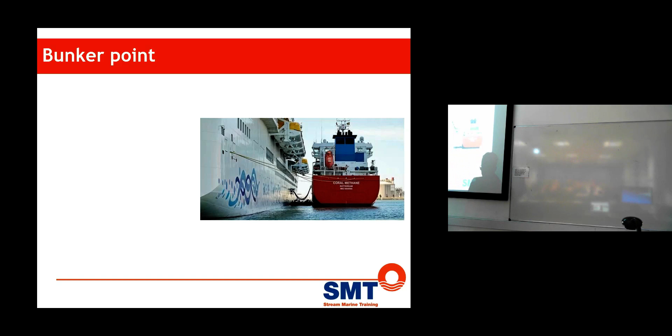Also, what they realize is the bunker speed is way too slow. So at the moment, they have to do it in Barcelona and also in the Canary Islands. The problem with the Iona is going to be in Southampton - they haven't really moved on very much with the bunkering there at the moment. They'll only have one port, and then the bunker speed has to be adequate.

So, vacuum insulated piping from the bunker station to the tank. That's a vacuum insulated pipe, double wall pipe, vacuum insulated.

LNG valves and breakaway coupling. In this particular case it's on this side. If the ship separates, it basically will break away - there's no gas leakage.

Ship related controls, and then the emergency shutdown to the supplier. That's like what Trelleborg does.

So you're saying there isn't the same thing on the Coral at this point? But they're using a pendant across. Which cruise vessel is this? AIDA Nova - AIDA Nova has all the equipment, but the other ships don't have it.

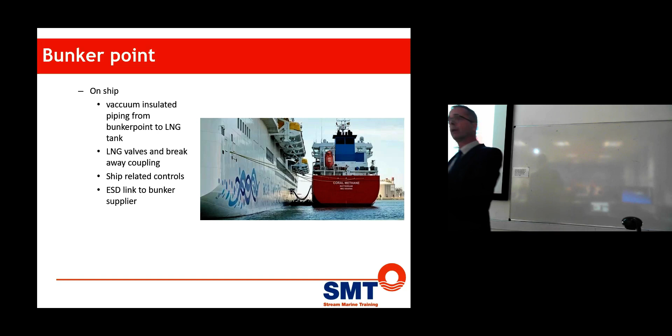Essentially you're putting it down to control of a pendant. Yeah, because originally it was the Cardissa, right? So that is completely different. But it's a work in progress.

Different bunker barges, getting more and more. This was the first one in the world, I think, without a pump. Now you get more bunker barges, ships we can already see here - cruise ships, ferries, Baleària as well, and they have the whole fleet redone now.

Also bunker barges, container vessels. Container vessels now doing simultaneous operation. Every day is a yay, we did another simultaneous operation.

The fact is, what's going to happen when the vent mast is going to blow off? We know roughly where the hazard zone is, but there's gantry cranes. So I wouldn't get too excited because we really haven't worked that completely out yet. We assume that certain things happen, but we can have problems with it in the future. Because at the moment you see them doing it with small ships, but of course there might be a bigger risk when you get to these larger container vessels.

Truck here as well, yeah. Same interfaces you have in the tank.

All right, I hope I didn't bore you too much for an hour. Was it more than an hour? My God.